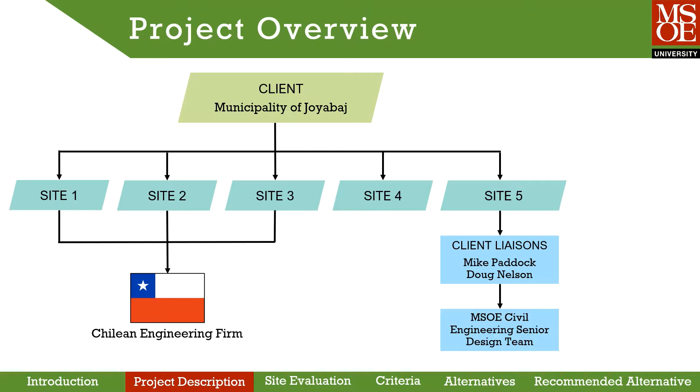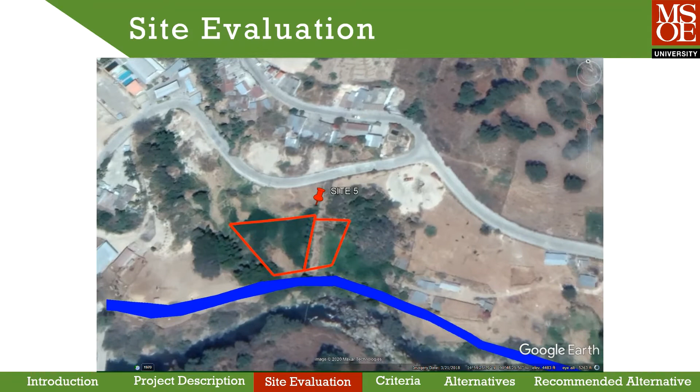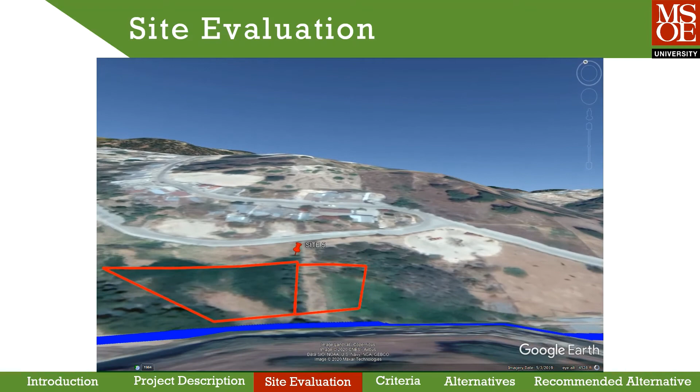We selected Site 5, which will serve a population of roughly 5,000 people within the community. As you can see, Site 5 is located south of central Joyabaj. This site was chosen because of its proximity to Rio El Arco, the river south of the site. This configuration will allow for the treated water to be discharged directly to the river. Additionally, the slope of this site is approximately 20%, which will allow most of the system to be gravity fed.

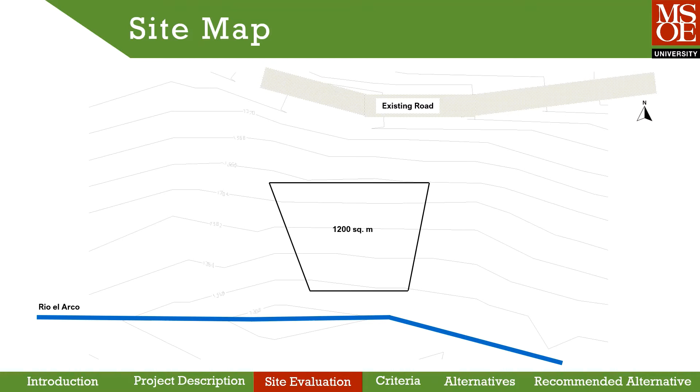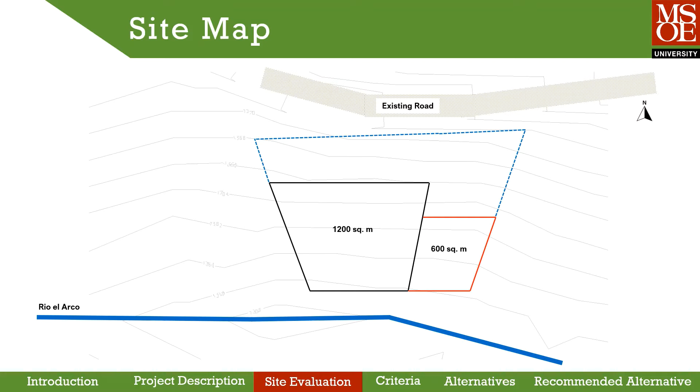The site consists of several parcels. The municipality of Joyabaj owns 1,200 square meters of land located directly north of the river. Adjacent to this parcel is 600 square meters of private land. Furthermore, the land south of the road is public right-of-way. Both of these parcels will need to be acquired prior to construction. The total area, assuming successful land acquisition, is 2,700 square meters.

Taking our client's needs into consideration, we developed 5 criteria for this project. The top criterion was reliability. We define reliability as the likelihood that the system will not fail if upkeep is not properly maintained. The goal of this project is to provide the community with sanitized wastewater. If the system fails, we will be unable to achieve this goal.

As previously mentioned, the area of the site is only 2,700 square meters. The treatment system must be able to fit on the site and accommodate for future growth. Because size is a limiting factor, land requirement and feasibility of the system was assigned a weight of 25%.

The area around the selected site experiences frequent power outages. Because of the unreliable energy supply, the client requested a system that has low energy consumption or one that could be powered on an alternative energy source.

The community has few trained wastewater operators, so it is important that systems requiring little or simple maintenance are considered. Lastly, because of the high-valued equipment and materials that will be used in the system, it is important that safety and security be considered. This will not only protect against theft, but also protect the public from dangerous treatment processes. This criterion accounts for 10% of the project.

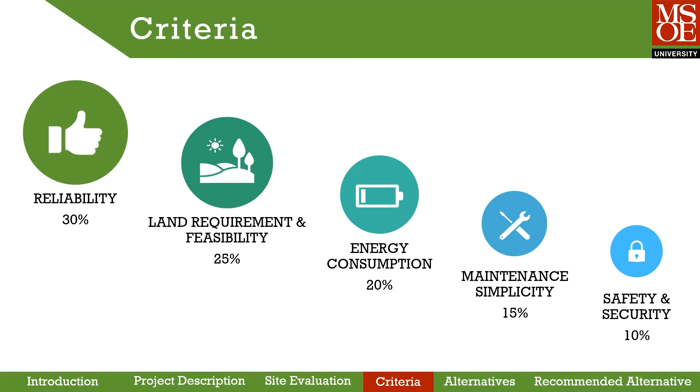Based on the 5 criteria mentioned, we looked into 7 different secondary treatment processes as alternatives to meet the community's needs. After preliminary research, aerated lagoons, activated sludge, and anaerobic digestion processes require consistent energy usage and routine maintenance and attention to operate effectively, so they were not further analyzed.

And while algae treatment was initially considered because of their off-grid operability, this process has intensive maintenance and significant land requirements that the community does not have.

Rotating biological contactors were considered for this project because of their low energy requirements. This process can be designed to efficiently utilize space, which is ideal for this site with limited land.

Trickling filters are fairly reliable and only require energy to distribute water over its medium. This process only requires daily observation to ensure that the system has proper ventilation and is not clogged.

The last alternative considered is the subsurface constructed wetland. This process operates completely off-grid and does not require any mechanical components. The wetlands only need maintenance for its plants and pipes. This treatment process does require a large area of land, but its minimal energy consumption and need for maintenance were optimal features to consider for further analysis.

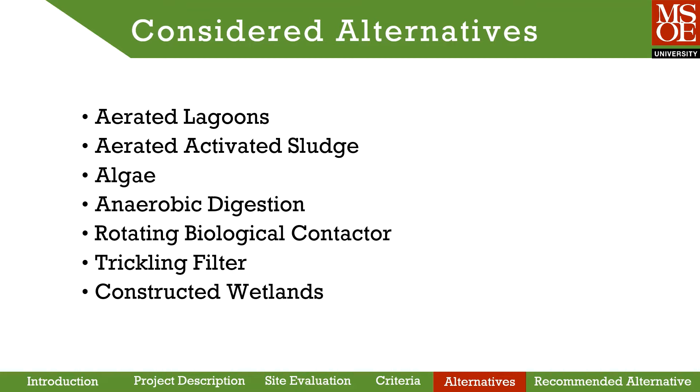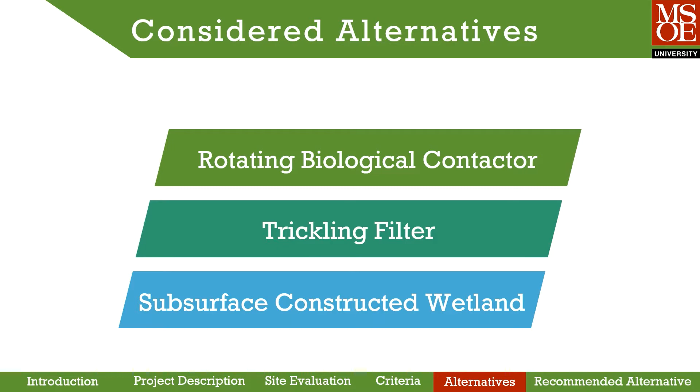Ultimately, the rotating biological contactor, trickling filter, and constructed wetland were further researched for their feasibility with the design criteria. These processes were assessed to ensure they can efficiently treat the high concentrations of BOD and TSS in the wastewater to meet the limit of 100 milligrams per liter of BOD and TSS, as stated in Guatemala's standards of Acuerdo 236. But with the expanding population of Joyabaj growing at about 2%, the treatment processes would be designed to 50 milligrams per liter of BOD and TSS instead.

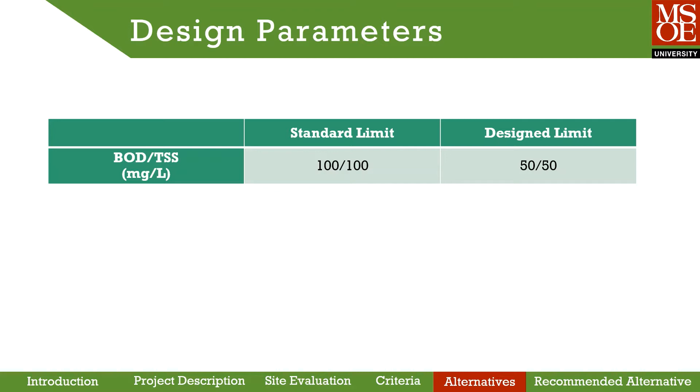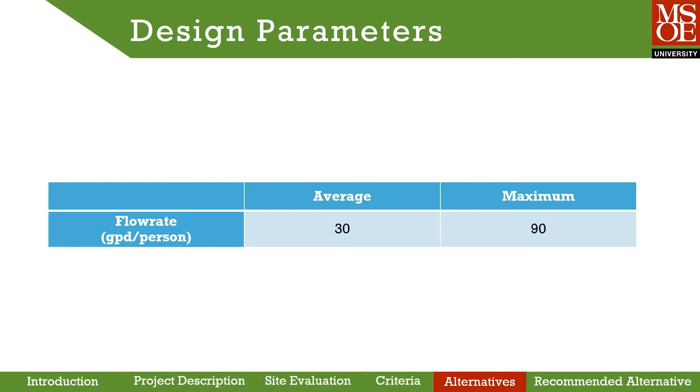The first secondary treatment process we looked into further was the rotating biological contactor, or RBC for short. Some advantages of using the RBC is that they're built as rectangular units to save space, which is ideal for the limited land available. When we were speaking to an Evoqua vendor representative, they recommended a unit with a size of 8 by 4.5 meters to meet Hoiba's effluent needs, and this fits right into the site.

Maintenance tasks are relatively simple. It requires regular weekly, monthly, and annual maintenance and inspection for its mechanical parts to ensure optimal performance. It also has low energy consumption to run the motors to rotate the discs.

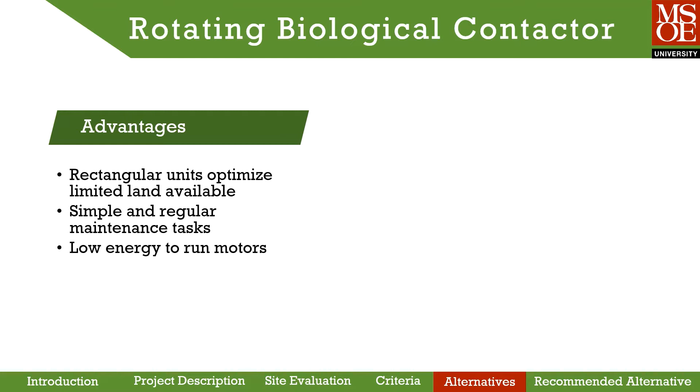Some disadvantages though of using the RBC is that it takes time to train an operator to learn the proper skills to maintain the system. If not maintained properly, the system can easily fail. They're susceptible to shaft failure, so operators will need to make sure mechanical components are maintained and that there isn't too much buildup of bacteria on the disc. Because of this, it's fairly unreliable.

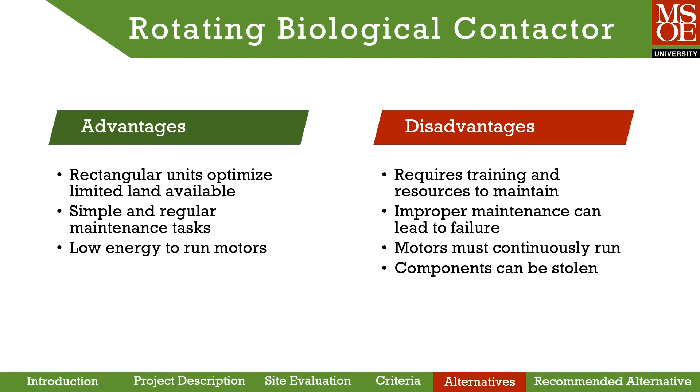The motors must also continuously run to prevent microbial deterioration and failure of the system, which might not be possible due to the frequent power outages. The components within RBC are also at risk of being stolen, so the system will need to be covered in a protective building. The second treatment process we further researched was the trickling filter.

Some advantages of using the trickling filter is that it can utilize locally sourced materials, such as rocks, so they would not have to worry about shipping, transportation, and storage of available parts. It could also potentially take advantage of the site's steep slope for its hydraulic head to distribute wastewater and allow for easy construction integration onto the site.

It also has simple maintenance tasks to ensure that the media is not overgrown and clogging the system. Even if the trickling filter is clogged, the system will still work, just inefficiently rather than failing.

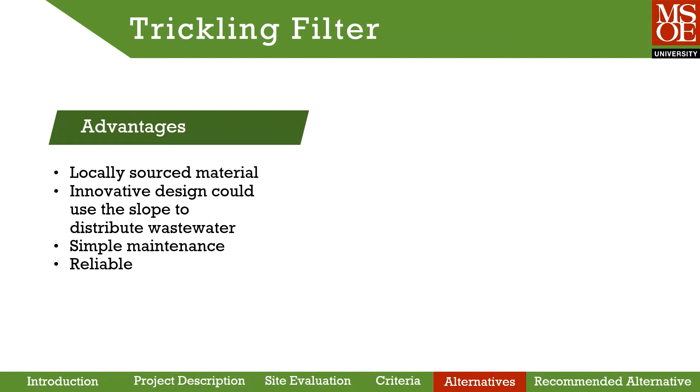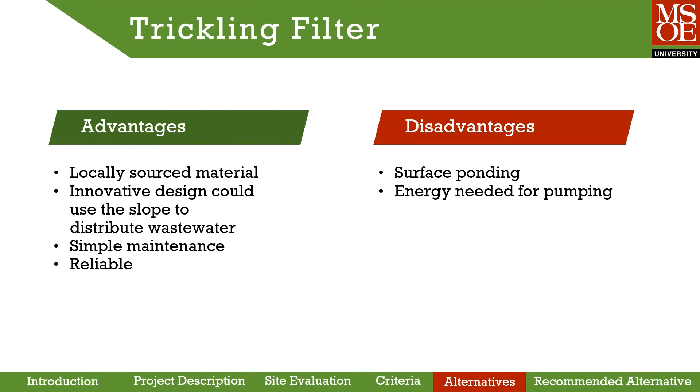Some disadvantages, though, of using the trickling filter is that if the media is clogged, it can create surface ponding and cause uneven flow distribution, develop harsh odors, and attract vectors such as flies and mosquitoes. It also requires energy for recirculation pumps.

The third treatment process we considered was a subsurface constructed wetland. Some advantages of using the wetland is that it's reliable, as it operates on its own without operator interference. It does not utilize energy, as the stones and plants in the wetland treat the wastewater as it flows through the system. It has simple maintenance tasks such as unclogging the inlet and outlet pipes, replacing any damaged plants, and routine checks of the wetland conditions and effluent concentrations.

These tasks are easy to learn and could be taught to any operator quickly.

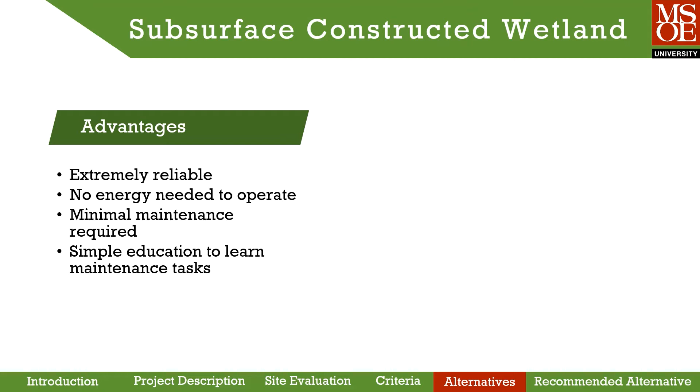However, there are two large disadvantages that outweigh the advantages. To meet the 20-year design population, a wetland of nearly 88,000 square meters would need to be constructed, which is unfeasible because the available site size is only 1,200 square meters. Even if the available site was large enough, a 20% slope would require extensive excavation to achieve the 1 to 2% slope for the wetland to operate properly.

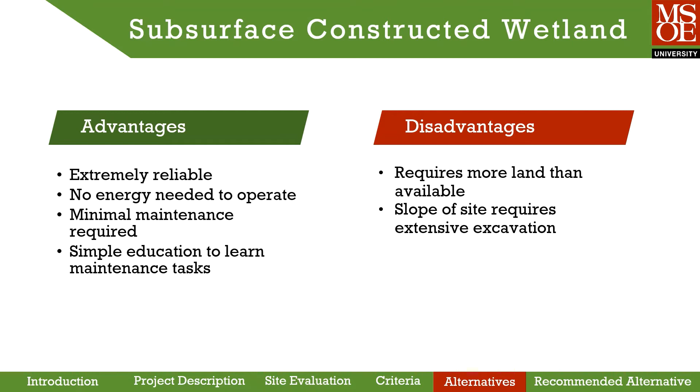After analyzing the advantages and disadvantages of the three alternatives, it was determined that the RBC was the least ideal treatment process for the community of Hoiba. This process has a high risk of failure and overall does not score well with the criteria to fit the needs of the community. While the wetland scored high with most of its criteria, its land requirement was too unfeasible in comparison to the available site size.

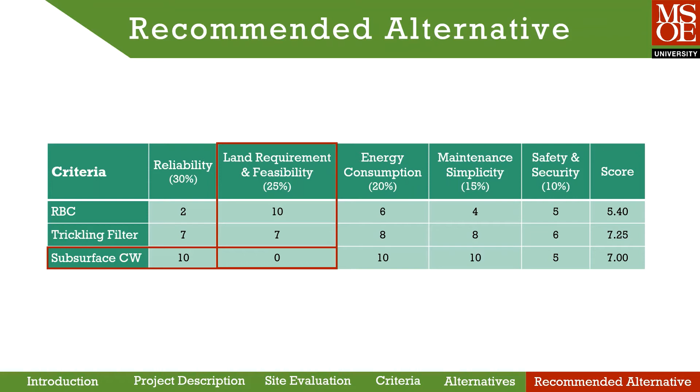Ultimately, the trickling filter was the best treatment process for the community of Hoiba. The process has low energy consumption, simple maintenance tasks, and is fairly reliable even when not properly maintained.

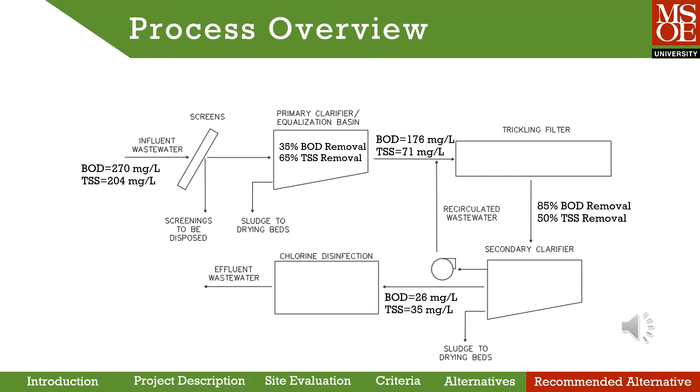Screens will be comprised of 15 bars and will be manually cleaned by an operator. The screens include a bypass channel in the event that bars become clogged. This is a fail-safe design to account for any missed maintenance.

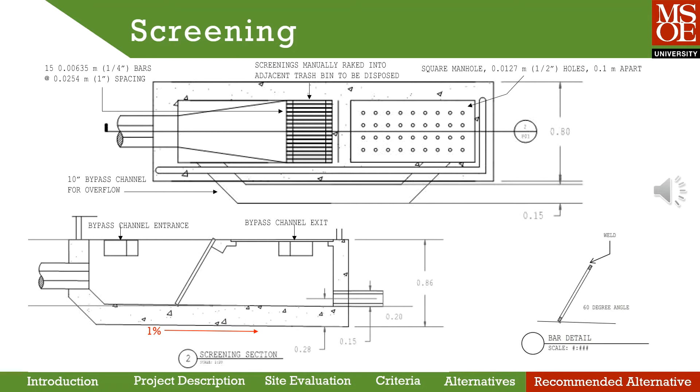The primary clarifier serves three purposes: settling out solids from incoming wastewater, equalizing flow, and distributing wastewater to the trickling filter. The design of the system was based on the typical overflow rates for primary sedimentation followed by secondary treatment. These values were taken from Wastewater Engineering: Treatment and Resource Recovery by Metcalf and Eddy.

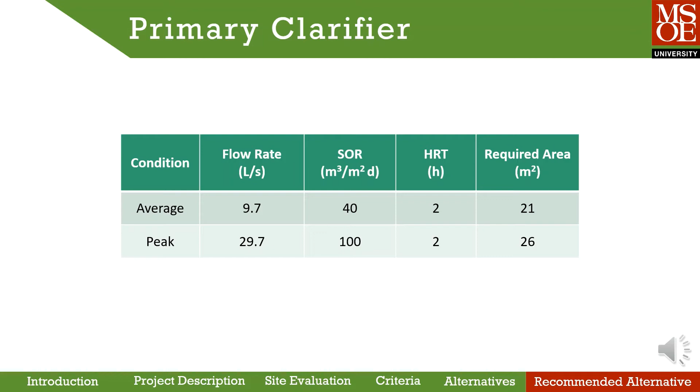The required size is 26 square meters based on peak flow. For the hydraulic retention time of 2 hours, it was determined that a height of 3 meters would be required for the tank. 1 meter of height was added to ensure room for sludge storage, and because the tank also serves as an equalization basin, an additional 1 meter of height was added.

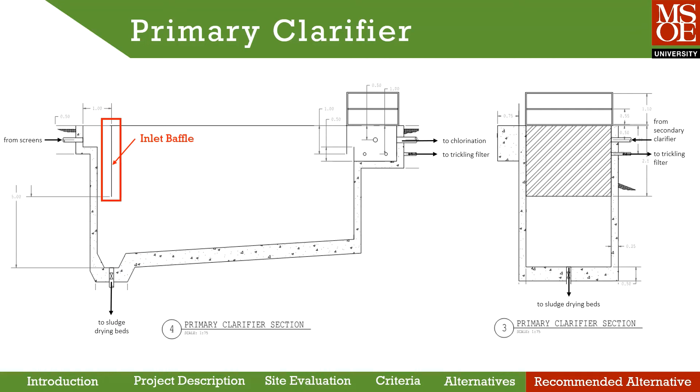The primary clarifier features a 2.5 meter steel inlet baffle to distribute the flow of incoming wastewater. Solids will settle in the bottom of the tank and flow via gravity to the sludge drying bed. The 6-inch diameter pipe has a butterfly valve that will allow the operator to control the flow of the sludge.

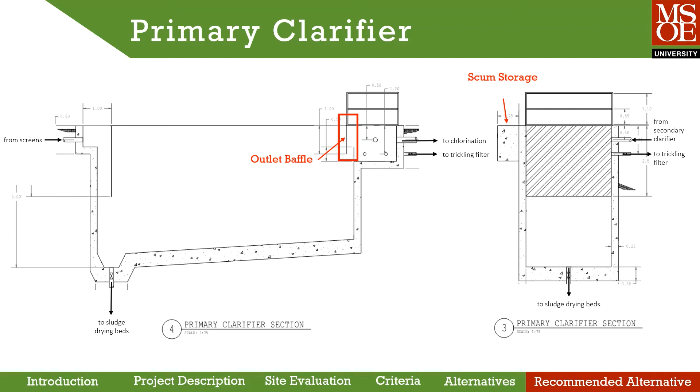There is an outlet baffle to skim the surface of the water and collect scum. Scum will be removed from the surface of the water manually by an operator using a skimmer and collected in a box on the side of the tank to await disposal.

Following the outlet baffle is an outlet weir which flows to the distribution portion of the tank. There is an inlet from the secondary clarifier that recirculates water to the distribution portion. There is also an 8-inch diameter overflow pipe that directs water to the chlorination tank prior to discharge in the event of excess flow.

4 4-inch diameter pipes distribute the water to the trickling filter. Each pipe has a butterfly valve that allows the operator to manually control the flow to various cells. Effluent from the primary clarifier will flow to the secondary treatment processes, beginning with the trickling filter.

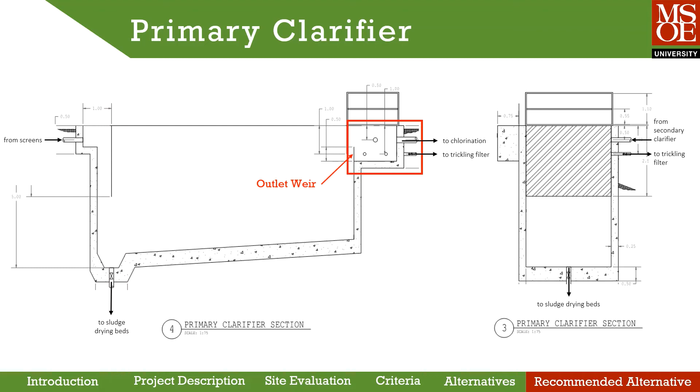It is important to us that we design a modular system that will not only service the population in 20 years, but the current population. For this reason, the current year, 10-year, and 20-year population was analyzed. According to Ten States Standards, a trickling filter must be designed to accommodate peak weekly flow rates.

The trickling filter was designed using two methods: hydraulic loading rate and organic loading rate. The acceptable ranges are given by Metcalf and Eddy and can be found in the appendix of our report. The hydraulic loading rate yielded a surface area of 420 square meters. This fits within the acceptable range of organic loading rate.

The system will be comprised of 4 separate treatment cells to accommodate the growth of the community. These separate cells will have the ability to be individually taken out of service for maintenance. The media will be locally sourced rocks.

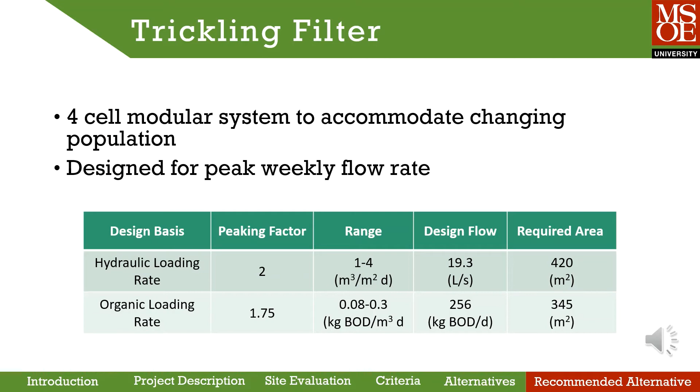Each treatment cell will have 5 separate header pipes to evenly distribute flow. The pipes will be supported by the wall at each end and by a pier in the center. The pier also serves as a footing for the trickling filter.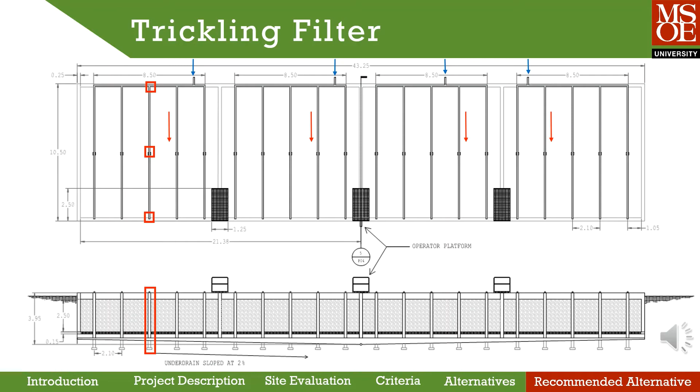Since we are not using forced ventilation, the air passage to the underdrain will be critical. The underdrain catchment system that holds the rocks will be cast-in-place concrete with holes. This design was utilized at another constructed wastewater site in the community.

The underdrain will be sloped at 2% parallel to the slope, where it will then flow into a channel that is open to the environment, sloped at 2% towards the middle, towards the effluent pipe. It will also have platforms over the end to allow the operator to inspect the filtration of the system.

2 observation ports will be utilized so the operator has the ability to look down into the filter and make sure that the water is able to trickle throughout the entire system. If there are any clogs in the system, the operator will be able to identify at which depth it is happening, and whether it is within the trickling filter or within the underdrain system.

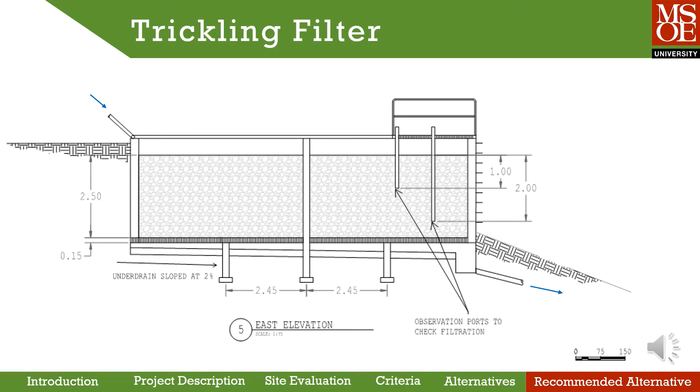Following the trickling filter, water will flow into a secondary clarifier to settle any solids produced from the trickling filter. This is designed similar to the primary clarifier that was mentioned before. Size is based on the larger value between the average flow and the peak hourly flow, using typical surface overflow rates found in Metcalf and Eddy.

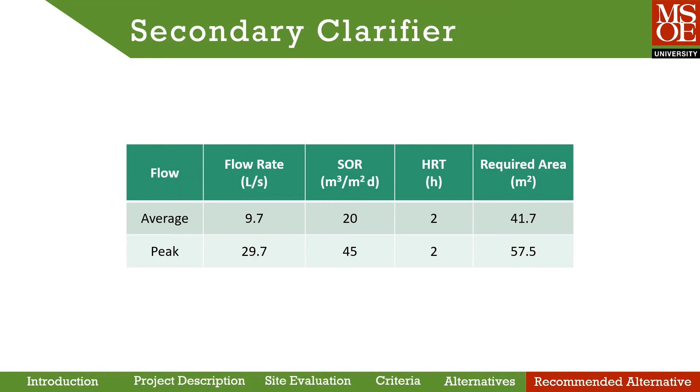From the design criteria, it was determined that the clarifier should be used for a peak hourly flow and should have a surface area of at least 57.5 square meters. It was also designed to have a hydraulic retention time of at least 2 hours. With those mentioned values, the resulting clarifier looks like this.

To help utilize the small site area, it was determined that a rectangular clarifier would be more preferable over a circular clarifier. A sloped bed allows sludge to settle by gravity and then be gravity fed to its respective sludge drying bed cells. An overflow weir placed near the discharge end of the clarifier is used to help control the level of water in the tank.

This should also help with the removal of any floating contaminants in the clarifier. However, since the trickling filter does not produce much scum, this is not a huge concern.

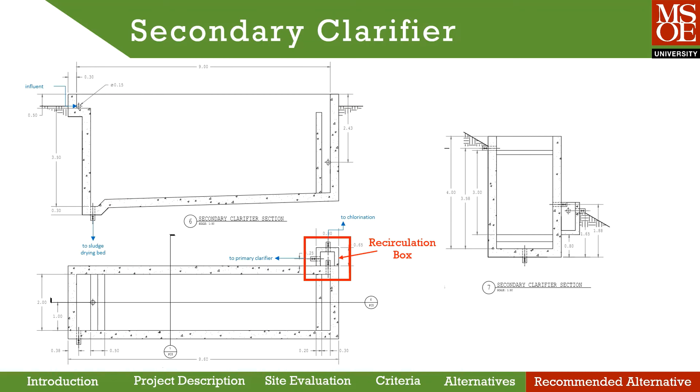The discharge pipe leads to a recirculation box. This box is essentially a wet well where the effluent can be gravity fed to the chlorine tanks or pumped back to the distribution box of the primary clarifier. This recirculation box was sized based on the size of a submersible pump needed for an average flow rate of 9.7 liters per second and a head of 6 meters.

For tertiary treatment, we designed a chlorination process utilizing a chlorine tablet injector and a contact basin. The contact basin was designed per 10 state standards using a peak hour flow, a peaking factor of 3.1, which led to a design flow of 30.1 liters per second. This will accommodate for a 15-minute contact time and the recommended constant water depth of 2 meters.

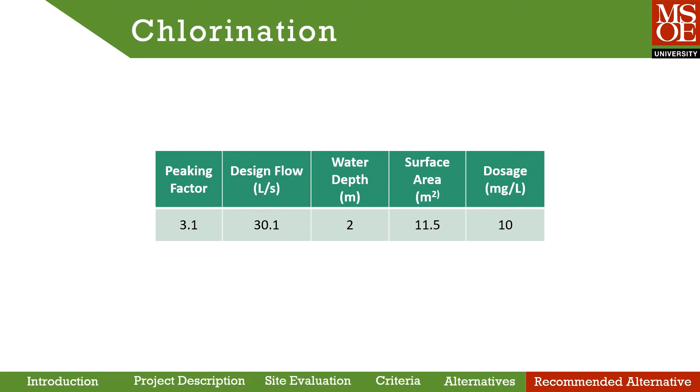Water will first flow to this highlighted box. Here, chlorine will be injected via tablets from a tablet injector. This injector will have a flow control weir inside, meaning dosage will be controlled by the rate of flow in the device, with no moving or electrical parts needed. This is an extremely common application in the area, using calcium hypochlorite tablets at a 70% concentration.

Water will then continue to flow through the contact basin to be mixed.

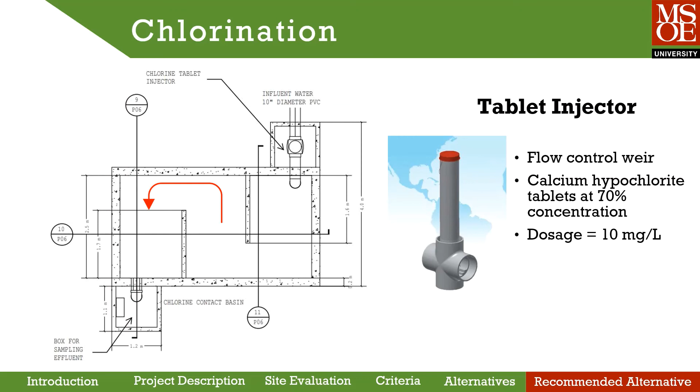Sludge from the primary and secondary clarifiers will be dewatered on sludge drying beds. Sizing of the bed is based on sludge production, as well as the design of drying beds on other sites in the area. The primary clarifier produces 1.56 cubic meters per day of sludge, and the secondary clarifier produces 1.66 cubic meters per day.

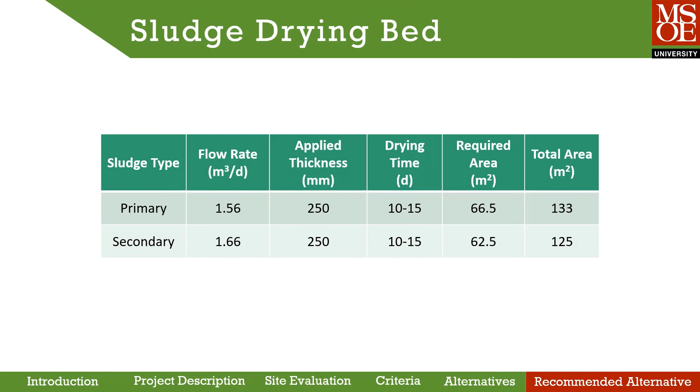The sludge will be applied in a 250 millimeter thick layer and allowed to dry for 10 days. The design of the bed features 4 cells, 2 dynamic and 2 static. This design allows sludge to continue to flow into the beds while dewatering is occurring. The underdrain of this bed will be composed of locally sourced sand and gravel.

Currently, the construction of this bed is unfeasible due to the slope of the site. Therefore, we would need to meet with the client to understand how sludge handling will occur at the site and determine the best course of action.

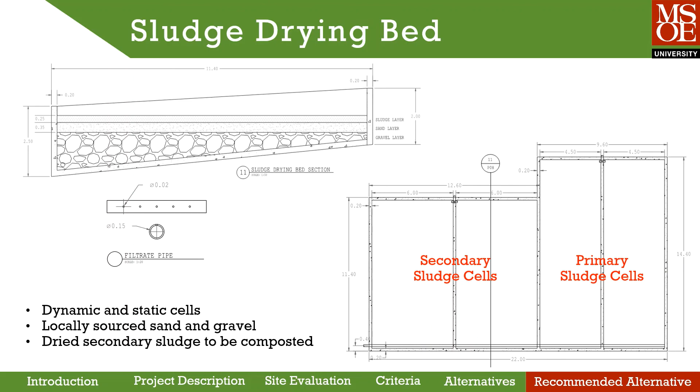The dewatered primary sludge will be disposed of, while the secondary sludge will be moved to a compost bed to allow for agricultural usage. Lastly, we developed a cost estimation for materials and labor.

These values are much lower than typically seen in the United States, which is primarily due to the lower labor wage. On average, workers receive wages that are equivalent to under $1 US.

Following extensive site excavation, clearing and grubbing, slab-on-grade foundation and walls for each treatment process will be constructed using hand pours of concrete. Hand pours are typical in this area due to the lack of equipment.

Altogether, this project is estimated to cost the community of Hoiba just over $16,000. This value was calculated using the typical labor rate and material costs in the area, first in Guatemalan quetzals and then converted to US dollars for a better understanding.

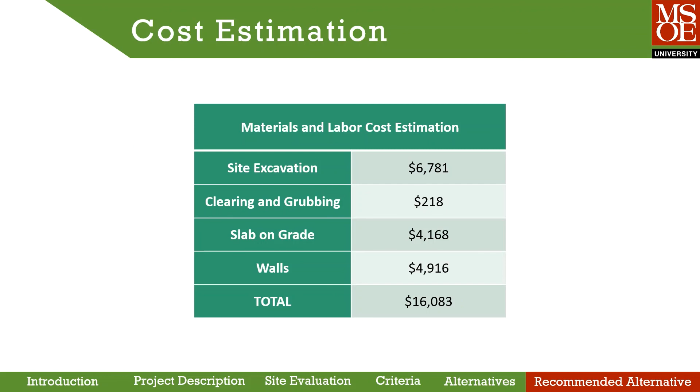Moving forward with this project, it is imperative that we keep a relationship with the community of Hoiba. Thankfully, some of our team members had traveled to the area before, so we were able to make assumptions regarding the soil on site. Obtaining actual soil samples and site data in the future would help immensely with structural design, which we assume to include pilings for stability.

It is also important to note that with a limited site area, we were not able to implement all designed parts of the treatment process. The composting bed was designed to receive the total volume of sludge produced from the secondary clarifier sludge drying beds. It was then to be disposed of safely or reused for agriculture.

We are also aware that we designed these processes to meet Ten States Standards effluent limits, which are much lower than the standards outlined in Acuerdo 236. Resizing these processes would reduce the size of each system, allotting more space for every step to fit on the site.